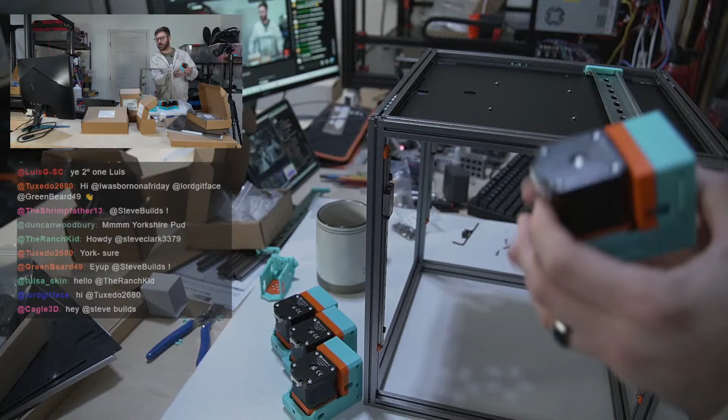So the last week we basically got, let's see if I change camera angles real quick here, all of the Z motor mounts built, and it went relatively smoothly. We are not installing the rubber feet until we install it on the frame. I did double check that. That's going to be after the AB motors. It looks like it basically has you build all of the different sub-assemblies, and once you have those all done, then you bolt them onto the frame.

So we got 4 of these done last week, and at the beginning of last week's stream we discovered an issue with the printed attachment pieces. Let me see if I can zoom in a little bit here. I'm going to change the autofocus, there we go. These DIN rails were a little bit short, a handful of millimeters, so I had concerns with these little printed pieces that if the DIN rail shifted towards one side, the other end could actually fall out.

So I took the model, because it's mirrored basically in both directions so you can scale it relatively easily, and I added 50% height to each of them. I installed one right now, and it seems like that's a good spot. So we're going to pop off the small ones. I don't know if this will be the case for everybody that gets this kit, or if my DIN rails are just a tiny bit shorter than intended, but I don't want to risk having the electronics shift.

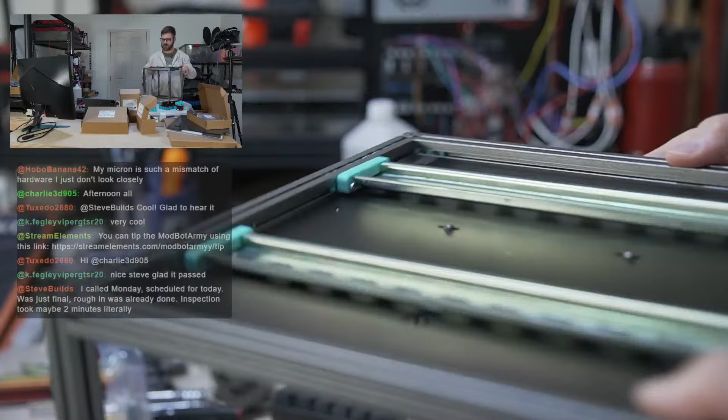So yeah, let's get these guys attached. I'm gonna leave them a little bit loose for right now, just so that way I can slide them around. We're not actually installing electronics yet. So yeah, you can see right now, with the DIN rail completely up against this side, this is our gap. Let me turn this, it's probably the easiest way to show. You guys see that gap?

So that's our gap. With the thickness of the initial printed parts, I was concerned that if it was favoring one side completely, we would have risk of the DIN rail falling out. So that's why I made it 50% wider. They hold pretty tight in the printed parts, but if for some reason it were to slide, I don't have to worry about the DIN rail dropping and any issues with electronics. That is why we ended up doing this.

I still have not gotten a chance to tell either Jason or Hartk, but I need to do that, because if it is a thing, I want them to probably update the parts, so that way people don't have to do what I did, which isn't a big deal because of the order of installation of this, but still.

You said, I called Monday, scheduled for today. It was just final, rough in was already done. Inspection took maybe 2 minutes. Wow, that's awesome. Yeah, I met our local inspector, I assume there's multiple, but I don't know with the size of our city how many they have. We had ours come out for the fan stuff I did, and he basically said he didn't have to inspect this, but the dude was really cool. I was asking him a bunch of questions about electrical in general, and he was happy to answer and show me the little cheat thing that he had.

The nuts on the bed extrusions, let me zoom out. Because there's not any covers on the end right now, this morning when I was flipping this over to put that first DIN rail on, all the nuts, I think it was the two up top and one on the inside, flew off onto the floor.

So I gotta be mindful of that. I probably should have just put a piece of tape at the end of it or something like that, because this is not the first time it's happened. You think I would have learned, but we'll put this off to the side. I don't actually think we'll need the frame for what we're doing today.

Okay, let's pull up the instructions here. Where are we? Here we are. Okay, it might be just your kit. I didn't have any issue with the DIN rails in the Formbot kit. Got it. Well, the Formbot kit will have rails from a different source that they're cutting differently. I haven't seen anyone else building an LDO kit yet, so maybe it's an LDO kit thing.

Hey, Nice. Hey, Raj.

Okay, so I didn't do this actually. We can do this if we want. There are two options for the Z-joint. Rigid, this manual only covers the rigid version. I guess we could install these guys. Actually, I already put the frame away. Let's just move on. This is what we did last week. Here's where we're at: the AB motor mounts. Let's start pulling out all the things we'll need for this. Motors are right here.

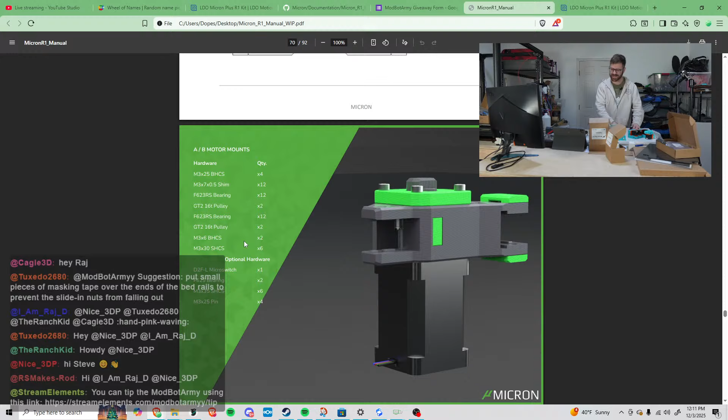Tuxedo suggests putting small pieces of masking tape over the ends of the bed rails to prevent the slide-in nuts from falling out. I just said that, Tuxedo. I should have probably done that, but I didn't. I agree. So I don't lose these, I'm gonna take these motor mounts out. I won't wait till it happens again. If we bring the frame back out and I remember, I will throw pieces of tape over them.

Okay, so M3. Let's just try to take out all of our hardware. This is M3 by 25 button heads. Now we need F623RS bearings. That's you guys. There we go, that's in focus, kind of. Okay, so shims, and we need GT2 16 teeth pulleys. What are these? These are shims, M3 by 6.

Interesting. The manual calls for M3 by 7. We have M3 by 6. I'm assuming that's what we're going to be using. I don't think there's any other M3 shims in here, so hopefully that's fine. We need some pulleys. This is a 16-2. These are 16 idlers, so maybe we don't need idlers for this section. Here's our other pulleys. We need the flanged bearings, and we're also going to need the non-flanged bearings.

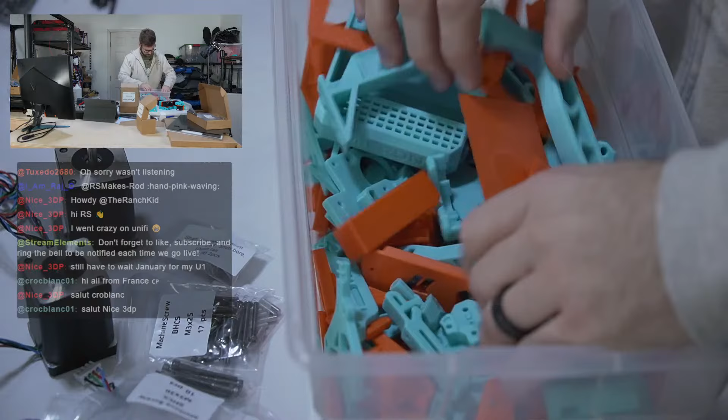Question mark. These are standoffs. These are bolts. These are pulleys. I think we're using these pins, I'm almost positive. Okay, let's throw all this hardware back in the bag and let's look for our printed parts now. So, let's see. Okay.

It should be one more motor mount, or yeah, motor mount piece. Start taking stuff out till I find it, I guess. There it is. Okay.

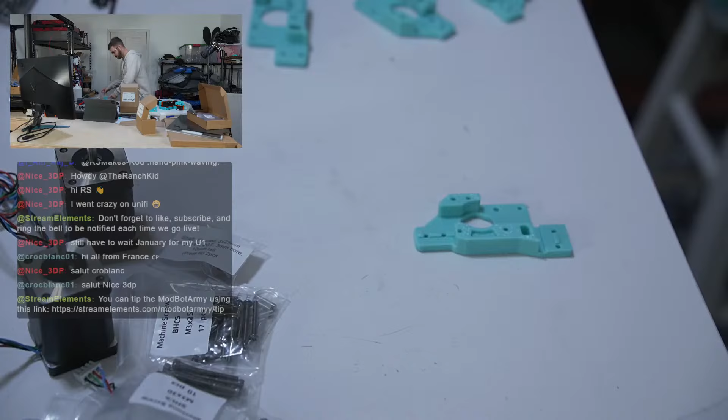Okay. So, if we are matching up this piece, let's zoom in a little bit. Oh, that's not what I want to do. So if we're matching up this piece, this is not... This looks like the right piece. Okay, it doesn't look like... This piece looks like it's using pins. But then this piece does not look like it's using pins. So I am not sure.

Let's see. Let's read. Let me zoom in a little bit so you guys can maybe see this too. More options than a brand new car. As Micron is as awesome as it is, there are two options for the AB. You can have a screw variant, no it isn't broken, or you have a pin variant. The former uses screws to house the various components of the bearing stack, the latter uses pins. We're going to be clever here and show you both options as the process is very similar.

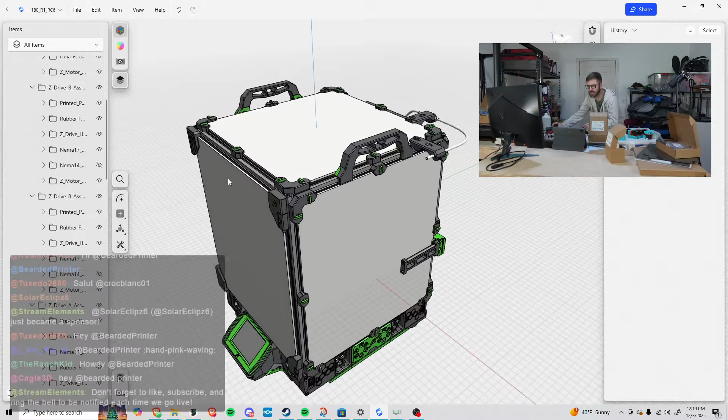I wonder if the CAD shows both options. Let's see. Let's exit isolation. Okay. Why are we not rotating? I thought shift was always my rotate button. What is going on here? There we go. Okay, don't need shift. Okay, so where's all the panels? Let's hide all panels. Panel assembly. Oops. Okay, so what I want to look at is this area.

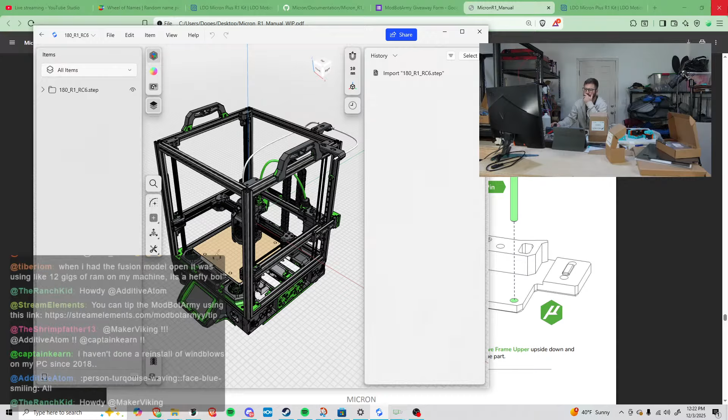I just would love to confirm that these are the right pieces. I have another idea of what we can check. Hold on. Let's set this off to the side for a sec here. And while it's doing its, oh, did it already load? Okay, cool. Okay, let's see if it crashes again, then I'm super sad. Okay, face A drive upper pin. Great. I just want to isolate this entire assembly.

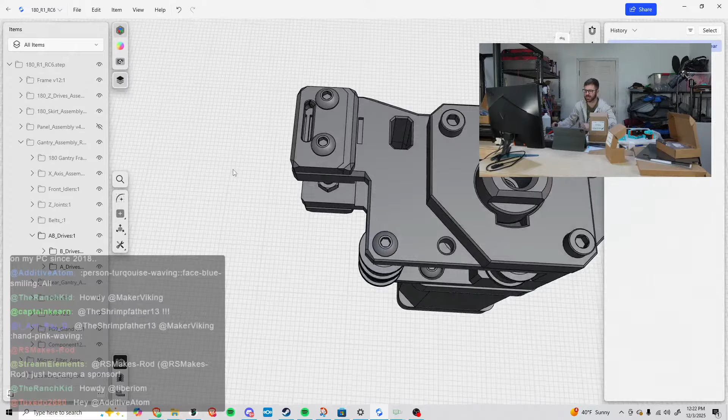So what I want to see is, this looks like it's a bolt. So the default setup in here is using bolts, not using a pin. So the next thing I want to check then is if we go to the Micron GitHub, I would like to see Micron Plus. I'd like to see if I can see the STL files and see the difference between the two, just to verify that I am using the right thing.

So if we go to gantry and we go to AB drives. Okay, so there's double shear drive.

No, that's not what I want. That's not what I want either. What is that? Twist lock retainer. It's not at all what I was expecting to see right now. Okay, here we go. A drive upper pinned. Oops. Let's just look at all the A drive stuff. A lower pinned. Okay. So this is how it looks pinned.

And it does have holes that go all the way through it, as we can see right here. So there is 1, 2, 3 holes. So this other side also has holes that go all the way through it. This one has a pin spot there. And this one also has a pin spot there.

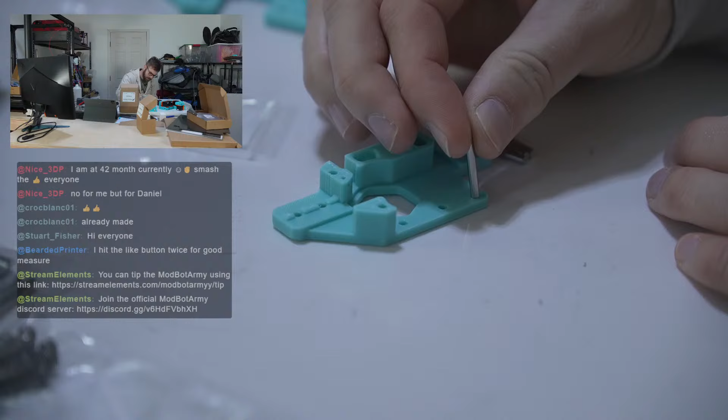Did that go all the way in? Sure did. Okay. Okay, cool. That's good. It says for the pin variant, place the A Drive Frame upside down and insert. Yeah, we did that. Fine. Still more options.

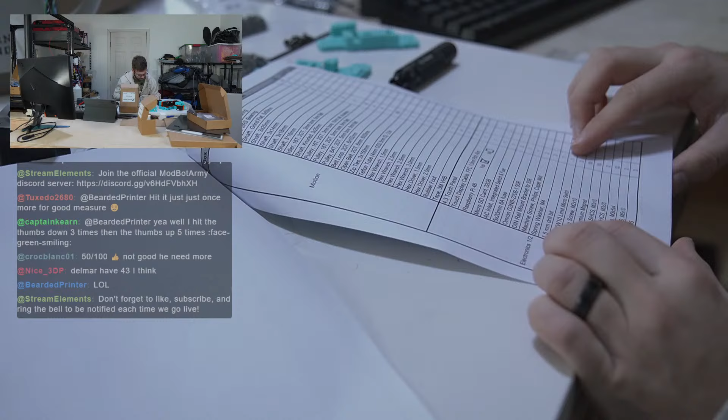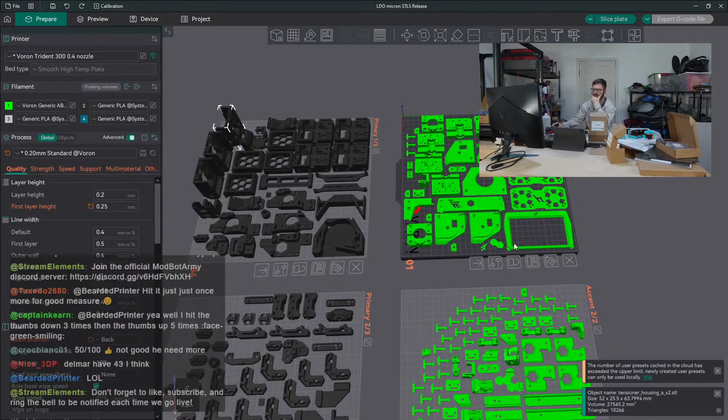Machine screws. I kind of get the feeling that this is sensorless, question mark. USB adapter, female, splicer. Okay, one thing I can do as well, it says that if you are doing sensorless, that there is this little piece here, and I'm pretty sure if we go to, here we go. So can we find that piece? Because if it's on here, and this was intended for, is this it? Y Endstop sensorless plug. Cool.

I'm gonna use that and make the assumption that it is sensorless, because this was given to me by HeartK for this kit specifically. So now I just need to find that piece. It's a tiny little orange piece. Does it have any sort of screw on it? It doesn't look like it.

Looks like it's supposed to be an accent piece, so it should be a tiny orange piece. This might be it. Definitely looks like it. Okay. I think mine had endstops and was going to use Klicky by default. Yeah, I think this one doesn't use endstops. I could have done a better look, but a quick glance over the BOM from LDO doesn't look like it had it. And HeartK had me print this piece out, so I'm gonna assume this is going right here like that.

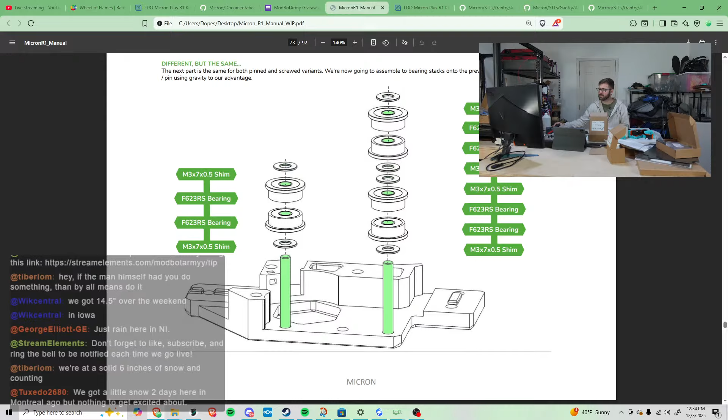Okay, so we should be good on this page. Shim, bearing, shim, bearing. Yep, that looks good. What does this say? It says preventative measures. Now, before you knock it over and have to rebuild the bearing shaft stacks approximately 7 times, we're going to secure them in place with the A drive lower piece. If using screws, you'll need to carefully screw them into the highlighted holes. If using pins, these are push fit. Ensure your end stop switch or spacers slid in the corresponding position. Okay.

So it's going to probably be in the same orientation, I would think. Is this right? This looks right. Wait. No, that can't be right. What is going on here? Okay, it has to be one of these two, right? Yes, it has to be one of these two. And it looks like it's this guy.

Why are we not going in? Okay, I'll get that piece in a second here. I just want to see why this is not going in at all. It's pushing through on the other side. Okay, let's try something here. Let's grab another pin. And this is the hole. Let's see, it's supposed to go into this guy. Yeah, that is tight. I'm nervous a little bit on this one.

I don't want to obviously push this one in too far because it's not even supposed to go in here, but I just want to see how much force it's going to take. And that is quite a bit of force. Like I see the part turning white a little bit, like an ABS when it's stressed out. You put too much stress on it, you can hardly see it, but at the very top there's a little bit of white. So I wonder if I should apply a little bit of heat to this part. It's very cold in this garage.

I'm doing pretty good. Not excited about shoveling after work. Got a promotion offer today. Oh, nice. Congratulations. That was to CowKing. Congratulations, man. That is awesome. Yeah, we've only had a shovel here a handful of times and I can't say I love it.

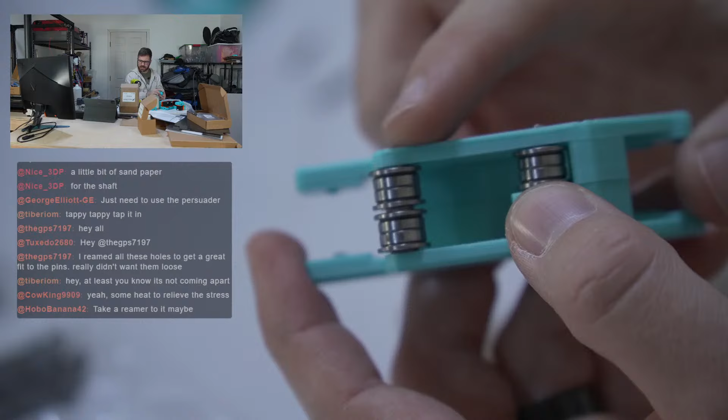It's definitely as far as we're going in. So the pins are sticking up a hair. I don't know whether it's supposed to be like that or not. I can measure it if you want, but they're sticking out a hair. On the bottom of the part, I'm starting to see stress marks, which is really making me think that I should not try to get in any further. We've basically bottomed them out.

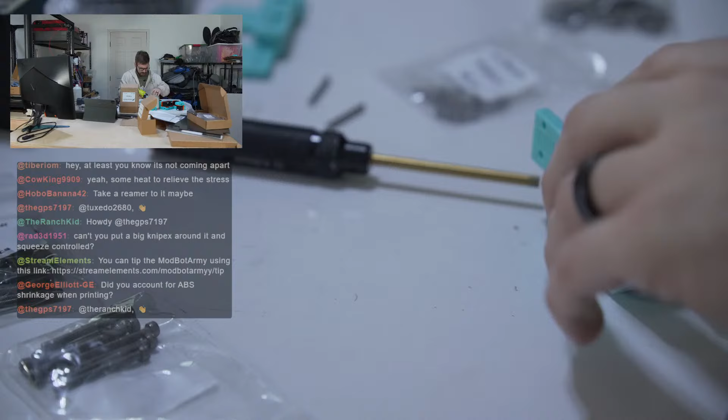I'm gonna hit the part with some heat. But I don't really feel comfortable going in any further with these pins. It's hard to get even into that spot. The parts are designed for ABS, so you shouldn't have to do anything else. That's generally how it's been with every Voron, I know this is not a Voron, but it's still intended to be printed with those same materials. I don't know on the pins whether they're supposed to be sticking out a little bit like that. I just don't feel comfortable going in further.

Because I'm seeing white on the very bottom here, which is a little bit tough to see because of the color of the part, but you can see white right there from the edge of the pin. I don't want to go in any further because to me we're basically at the wall. To be fair, I did mine like they were Trident idlers, but Mini, I think a couple people in the Discord were working on the pins. I recall SP had some issues and had to reprint the part.

Yeah, and these pins, this guy's up a little bit higher than this guy, but I just don't know what the call is. Bearings are spinning fine. The CAD doesn't show the pin mod, it just shows the screw version, so I'm not entirely sure. I don't think anything we did is going to compromise the actual part. I just don't know, with the way these are bolting, if having these pins sticking out a little bit is going to be an issue or not. I'm gonna say probably not.

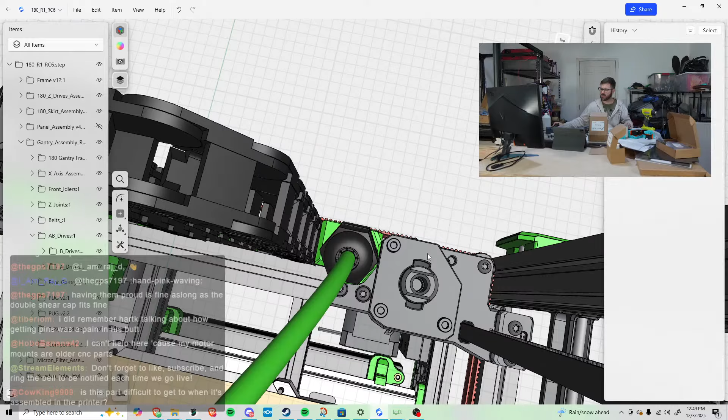It looks like the motors bolt on this side, and this side's gonna be up in the air. So if we look at this and we exit isolation mode, oops, not what I meant to do. So the pins are gonna be... let's see if I have this piece like this. So the only thing the pin is going to be bumping into is this piece right here. And I wonder if this piece...

Is this part difficult to get to when it's assembled in the printer? It's part of the flying gantry, and I haven't had to take that apart before on a 2.4, so I don't know entirely. I'm curious to see though, if we look at this piece, is there a section for the pin? Okay, this looks like it's the piece. And this is gonna bolt on like this. So this to me, wait.

I'm curious. I think that there's the hole. I think the hole in the bottom of this part is for the pin. Yeah, it's definitely for the pin. Okay, yeah. So the pin that's sticking up isn't going to be an issue because there is a hole in this part. That's my only concern. So that's not an issue.

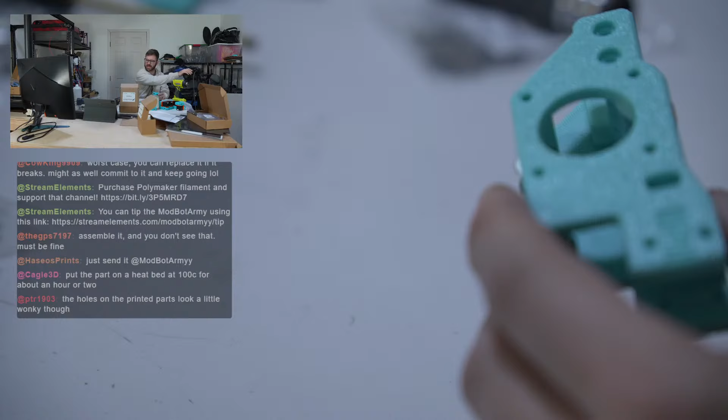This one's definitely a more aggressive one, so I don't want to melt the part completely. Yeah, I cannot go more than that. I see the part getting glossy. That's enough. We're not doing more. Okay, well, it did get the part a little bit warmer than I would have liked, you can kind of see the hint of gloss right there. But it did get more heat to where I wanted it to, so the part does look more solid now. So I think we move forward.

I am concerned that we might have to do that exact same thing again on the other side, but it looks to be a little bit different. So let's get back to it and see. The holes in the printed parts look a little wonky to me. Some of them I could see. Yeah, so this one's definitely wonky. This was a wall generating issue. The wall right here just looks bad. It looks like it's gonna almost pop out. That doesn't look good. But a lot of the other holes look fine, so that seems to me like a slicer thing.

I do have a vise. I have a really large vise, actually. Okay, let's just continue and see. I don't recommend doing what I did, but desperate times. Okay, we already double checked the shims.

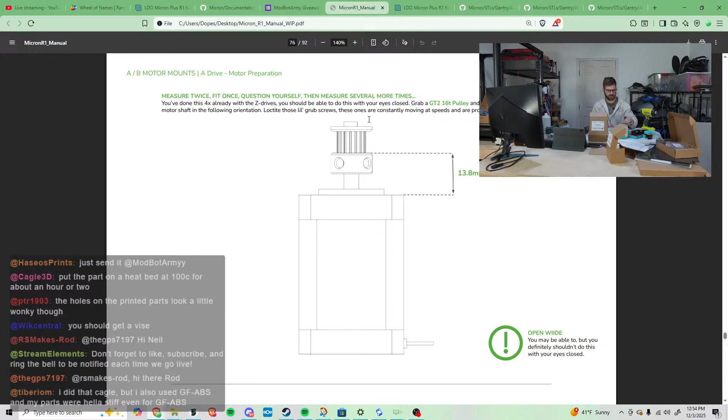What did Cagle say? Put the part on a heat bed at 100C for about an hour or two. You need to warm it up. I built it in annealed PETF. Holy crap. Did you use pins too? So yours was a struggle? Got it. So you reamed yours then. Yeah, my concern with reaming was that the pins would be too loose. But that might have been a better solution than using brute force and doing what I did. I don't know which one was the better call.

Hey, Balance. Okay, so for these, this is going like this. Let's do the same thing. So we need those little set screws. Where are they? There they are.

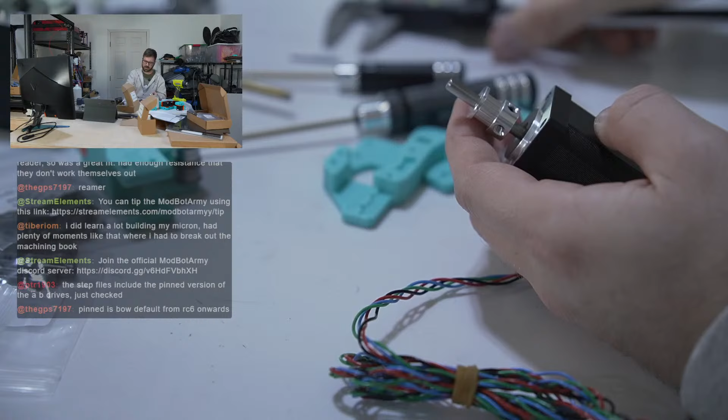Okay, let's really quickly check that again. Pinned is now default. Got it. Feels pretty dang close to where we want it. 13.8. No worries, man. Are you typing on a phone or computer? Okay, let me do a little bit more ugga-dugga. Okay, that seems plenty tight.

Double shear goodness. Are you not blown away by all of these Gucci options? There are 2 mounting options for the AB motors. So ours is dual shear. Dual shear adds a second bearing to further support the motor shaft when it's under tension from the belts. If you're not planning on using dual shear, you can screw the motor directly.

Default decision. Okay, so we are using this. So we are going to need, let's see, it looks like wires going out the right side. Then this is facing like this. Okay. And then we need that top piece that I just put away. So here they are.

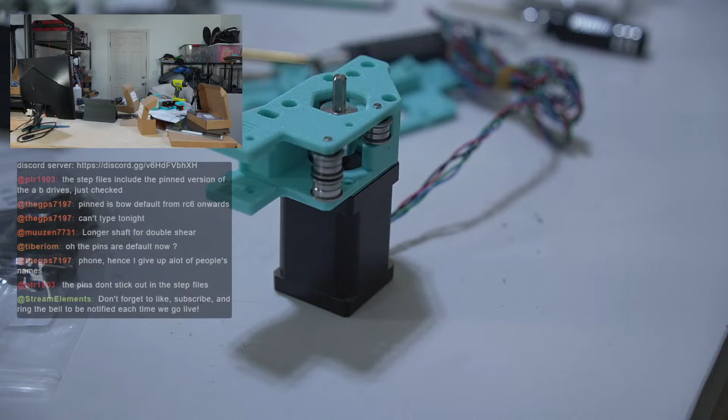Okay, so it's gonna go like that, but we need a bearing to go in here. So I didn't take out these bearings. This is a larger F695 bearing. I'll get the bearing. Where does the bearing go in? It looks like it just goes in from the top here, right? Based off this image, it just pushes in from the top of this part.

Like this. There we go. Oh, do you push it all the way down, I assume? Whoa, that really drops down. It really drops in there. Okay.

Cool. And now we need M3x35 socket heads, which I know we took out a moment ago. Oh. Wait, no, it said M3x35. So let's get M3x35. M3x40s, M3x35s. Hey, Petty. Goes in from the top and uses a twist lock. Nice, okay. I assume I have the twist lock. I don't see it in the instructions yet, but I will. Curious if it calls it out at all.

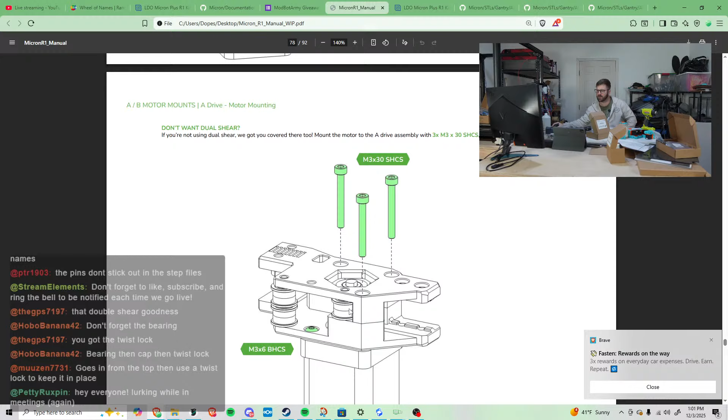Don't want a dual shear if you're not using dual shear. Huh, it doesn't show the lock piece. I saw it in the CAD a second ago though, so I know what you're talking about. Let me see if I exit isolation mode. This little guy, right? Let me see if I can find that. And I assume it's gonna be in the same color probably as this, so orange. Maybe it's not, actually. This looks like the piece, and it's definitely in blue. Okay. So this looks like the little nut piece that basically goes in.

Okay, is there a trick to getting it to turn? Is there a tool? It definitely needs to spin. I see that. Can I do it before? Let's see. So it looks like it twists to the right. Boy, I use Knipex. Okay, got it. Maybe I should secure this in place first. No, because then I'm gonna have a socket head. Okay, we'll try it like this. I've got my Knipex, so let's see if we can just do this. Maybe about there. Baby. All right. That worked.

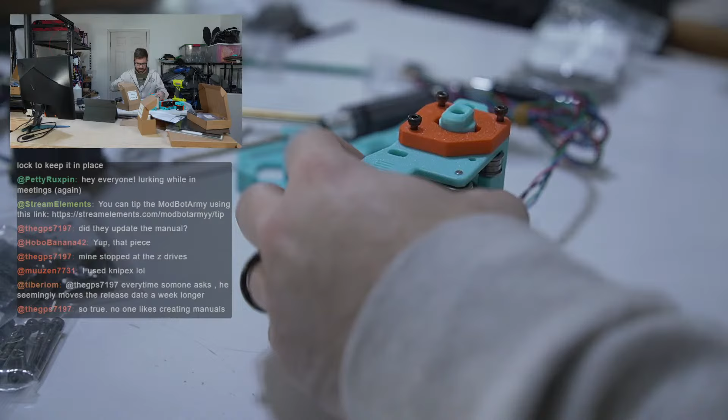Awesome. Okay, cool. Yeah, let's do these last 3 bolts then on this guy. So one goes here, all the way down. One goes here. One goes here. Okay. These are gonna be 2.5 millimeters. This guy, yep.

Every time someone asks, he seemingly moves the release date a week longer. Wait, did they update? Oh, got it.

Yeah, so far I've mostly been referencing the manual. There's been a few question marks where I'm like, all right, let's check the CAD, but so far it's been largely the manual. I know it says work in progress, so I anticipate there will be gaps like these little twist pieces. But so far, I'd say the manual's been pretty dang good. Okay, I think that's tight. So the last thing is just, it looks like an M3x6 button head, which is gonna be right here.

Yeah, creating manuals is a ton of work. Let's see, can we get this through? Yeah. So I'm part of the content team at LightBurn, and a fair amount of my team works on the documentation. I do the videos for the documentation, but the amount of work that goes into good documentation is absolutely bonkers. It is a ton of work. So every time I see documentation that's thorough and covers a lot of things, it is not a simple task or a fun one at that. But boy, is it a necessary one for people to be able to follow along.

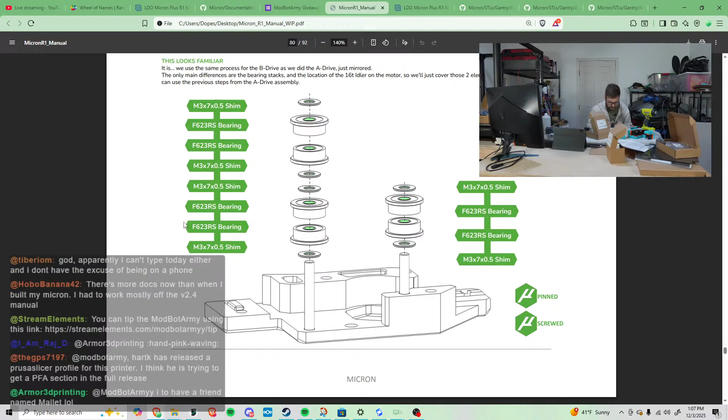So now we're on the next side, so we get to do it again. Fingers crossed that we get through this without doing any irreparable damage. I guess nothing's irreparable. Okay, on this side it goes into the deeper pocket first, so I am absolutely going to hit this with heat. I think we'll use the more aggressive heat. I'm going to go further away because I saw the part getting a little bit glossy on the last one.

Let's see if we can convince this part to accept our pin without such a scary struggle. I really want to get more than just the top, the walls where the pin's going in, because that's where we saw a lot of those stress marks. This is a really hot wand, it's for BGA reflow or rework, so I definitely don't want to do too much. That might be honestly enough. Let's also not have it pointing towards me so I don't catch on fire.

The time it's taking me to get back over here might be not great for what we're trying to do. It's already probably too late. Yeah, it's already looking stressed out. We're likely going to have to do what we did last time, which is just YOLO it, hope it doesn't split, and then hit it with heat after to try to repair some of that. I'm wondering if, instead of hitting the pin, I should hit the printed part like I did on the last one, against the quartz.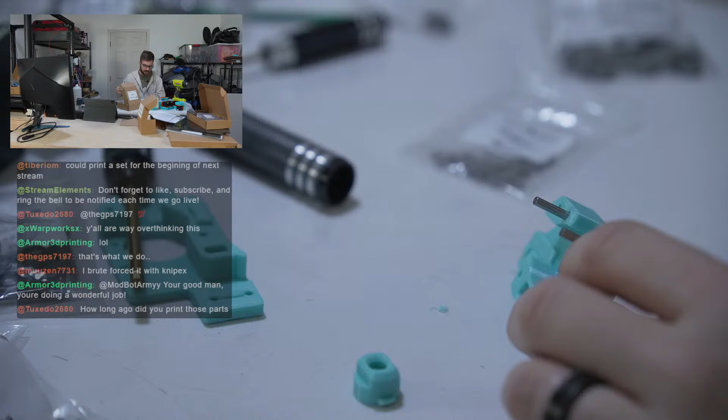Okay, let's do the other pin. The other pin should go in much easier. Yeah, this pin goes in piece of cake. It's something about these deeper ones where they just required a lot more force. Using the Knipex might have been a better route as well, just to get it over the pin and press it in. Anyways. How long ago did you print those parts? 2.5, 3 weeks maybe? It was before we started the build, and this is week 3, so 3 weeks-ish?

Double check those shims. Okay, so this side should, and keyword should, go on a lot easier because this is shallow. Yeah, this is the shallow side. So let's see if this just goes right in. Let me make sure they're lined up correctly. That looks fine. That looks fine.

Nope. Still wanting to push through. I might Knipex these. I just want to make sure that it is lined up correctly. Let's see if I can just get my thumb on it and push. It's not. That went in a little bit. No, not really. Okay, yeah, let's Knipex this.

A little bit more. The Magigoo polypropylene stuff works well. That's one of the ones I remember seeing. I just never used it myself. I try not to, oh, okay, that's too wide. I try not to speak too much on things I haven't actually tested myself. If there's enough people that I know that print using something, I'm kind of okay with it, but I'm not

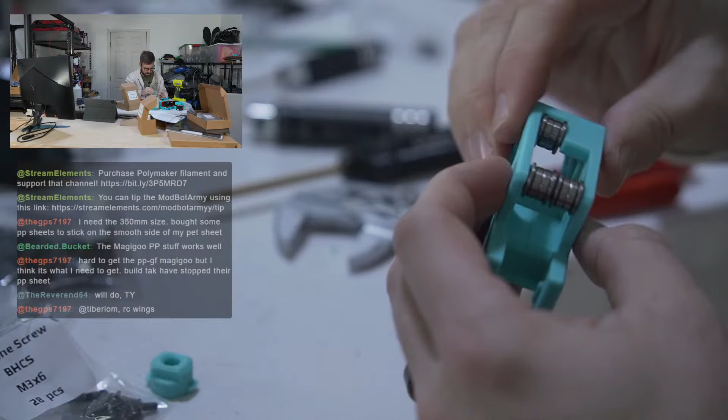Okay, that seems like that went all the way. And that went all the way. Okay, I think that's good. Parts are spinning, pins are sticking out of there. Don't see really any, oh, there's a little bit of stress mark on this one. That's fine. That's how the other one was as well.

Yeah, I think the pins, I don't know, whatever. I guess the reason doesn't truly matter. We won't really know, but I wonder if the pins are slightly large on the ends and that's what was causing part of the problem. But it might not be. I don't want to say that that's the issue. I'm fine with saying it's user error. We can totally blame. I'll take the blame.

Okay. Hard to get the PP GF Magigoo, but I think it's what I need to get. BuildTak have stopped their polypro sheet. Is BuildTak still around? Man, I loved BuildTak for so long. But I don't think they do events anymore, and I just don't think they're around much.

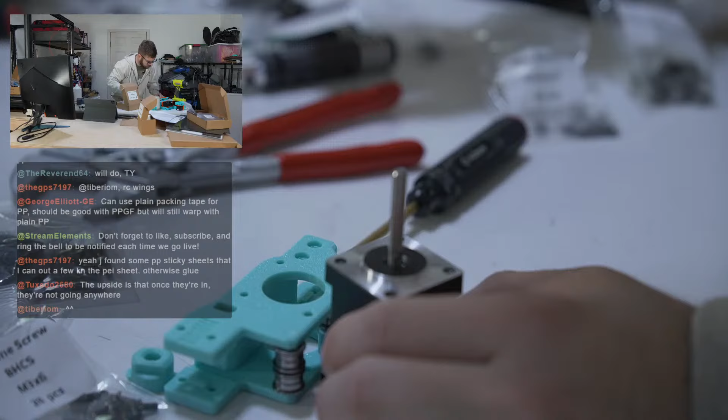Okay, so for this one, we want 11.6 on our calipers. So let's grab our other motor, which is right here. Where is our other pulley? Here we are, last pulley. The upside is that once they're in, they're not going anywhere. The pins, is that what you're saying? Yeah, they're definitely not going anywhere.

I have a feeling everything is gonna be fine. That whole instance we just went through, I could see someone trying to build this and being like, what in the world? Which, I mean, we did too. But I think it's all going to be fine. Like I said, I don't think it's going to affect performance. Or not performance, but integrity of the part, which in turn, I suppose, would affect performance.

Okay. So we're just doing single set screws on this too. It seems like this kit only has enough for one set screw per pulley, which is a little odd. It's probably something else I should note as well, but considering there's a flat section on these motor shafts and they've got Loctite on them, it should be fine. I still think it would be not a bad thing to include a second one in this kit for all of them, but is it necessary? I'm gonna say probably not.

11.6 is what we want for this guy. 11.6. There we go. Okay, and this one is measuring from the top of the motor to the bottom of this upper lip. So let's turn this like this. And we want this. That's pretty low. I'm gonna say right about there.

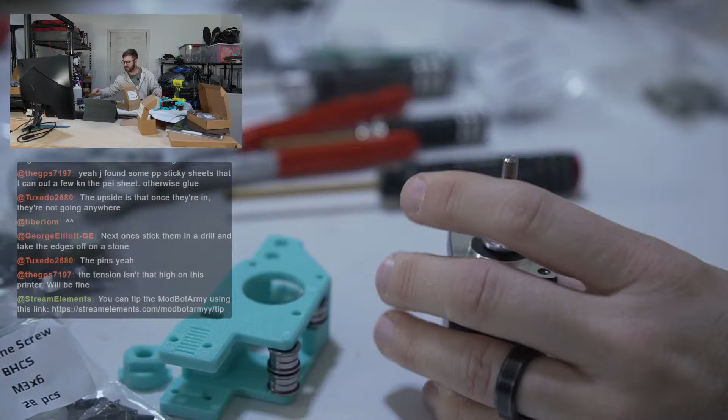Okay, so we did that. Yeah, we did that. This is saying now it's the time to sit and admire your work again. As we previously mentioned, the rest of the steps are the same as A drive, so once you follow those, you should do the same.

Wait, you should have something that resembles below. Oh, bearing retainers. So it does mention the bearing retainers. Okay, cool. So let's just go back up to the other one and basically mirror that, which I think is just the orientation. So I assume that if on this one we've got motor going out this side, we probably want it going out the opposite direction on this end.

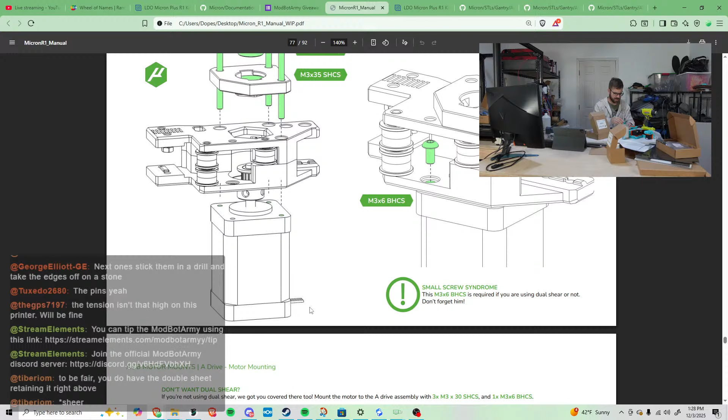So let's see, like this. I think like this. Maybe? What am I doing here? Yes, so this should be opposite. Okay, so yeah, this looks like it should go right here, like so, which is cable going out left side here. Then we need our bearing. Where's that bearing at? There you are.

My thumb actually hurts because in the process of trying to remove some of the remnants of the PET, some of the PET glass fiber, I was using one of those scrapers and had my thumb in a place where it shouldn't have been and slipped and nicked myself. Luckily it wasn't horrible, but it was at that point where I told myself, I'm done trying to clear this. Like this sheet is too far gone.

Is this upside down? This feels like I did this. No, this has to be the right? There we go. Yeah. Okay, now I can push this all the way down. There we go. And then we insert this like so. Let me just make sure. Okay, so this one, it's turning towards the left. Just want to make sure I don't force it in the wrong direction.

I did not Loctite the grub screws, but the LDO kit comes with Loctited grub screws. There's already dried up Loctite on them. Is it as good as actually Loctiting it on the spot? I don't know, but in the case where LDO kits have had Loctite, I haven't done it in the past and it's never been an issue. So we're gonna just roll with it. But if you were building this not from this kit and your grub screws didn't have Loctite, then yeah, you'd absolutely want to Loctite them.

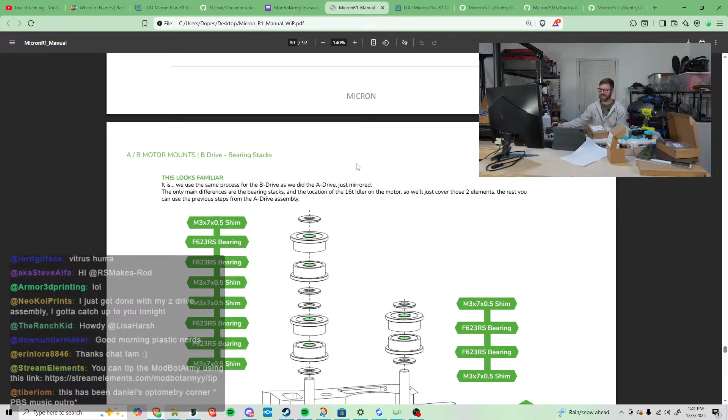Dude, if you don't catch up to me, something's wrong, because I'm a lot of things, but a speed builder is certainly not on that list. Okay, so we're done with this. We did this, we did that. Sick! We're on XY joints. Awesome. So let's take a look at these. These turned out, I think, really nicely, all things considered.

I'm curious to know, on yours are you using pins, or are you using bolts? If you're using pins, let me know how tight or not tight the tolerances are. I'm really curious, because ours were very, very tight. But yeah, these look good. Look like AB motor mounts to me. Quite pleased with the end result. You can't see my stress marks. They're all hidden behind the bearings, but I think these are gonna work totally fine for us. So let's get started on the idlers, since we've got a bit of time here.

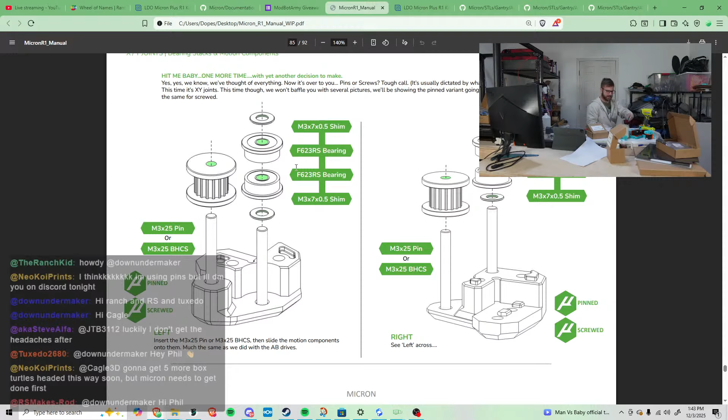Where are these pieces? Okay, this looks like one of them. So it's gonna be in our primary color, not our accent color. Could be 4 of them. The issue is that these pieces look kind of similar to other pieces. Oh, actually, these are not. Okay, so there's one. 2 of the pieces have heat inserts, so I put them in a separate bin. So we only need to find 1 more of these guys, the 2 beefier ones. God, we're gonna have to do more pins. I'm so nervous. I mean, we'll probably be fine. We've already gone through this once.

Where is our last piece? There's a lot of pieces to this build. Granted, a lot of these are skirts and screen mounts and stuff like that, but digging through this, there's definitely a lot of parts. So, here we go, found it. Okay, I think that's all the prints. Oh, you know what? We're probably gonna need the little spacer guys, aren't we? I'm sure we will. Okay.

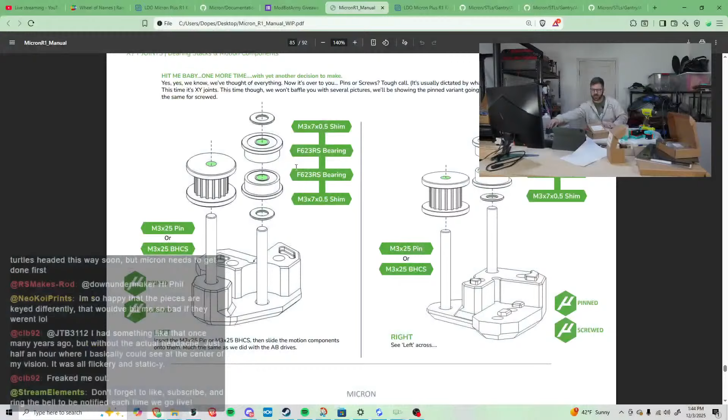We got a Britney Spears reference. Hit me, baby, one more time. Love it. I guess we know. We thought of everything. Now it's over to you.

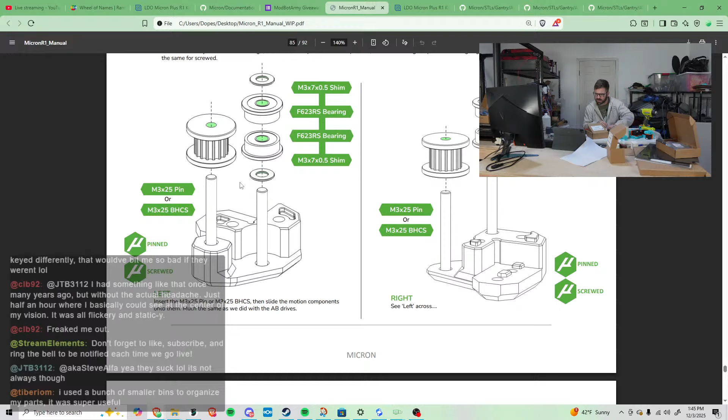Pins or screws? Okay, so we're doing pins. These are the same. Wait, are we doing pins for this? We can't be doing pins for this, can we? We don't have enough pins. I'm counting 1, 2. I don't think we have enough pins. I'm so happy that the pieces are keyed differently. That would have bit me so bad if they weren't. Yes. Anything that can be done in the design. If we were supposed to use bolts, there's no way. But I am confused now. I'm very confused.

Let's check something here. I assume that if we were supposed to use bolts or pins, they would be named as such. So where's the motor mounts? Okay. These are 100% pinned, at least according to the name. So we did that right. But if we're looking at these guys, this doesn't say anything about being pinned. Where's the other ones? Upper right, live idlers. I don't know what the significance is of that.

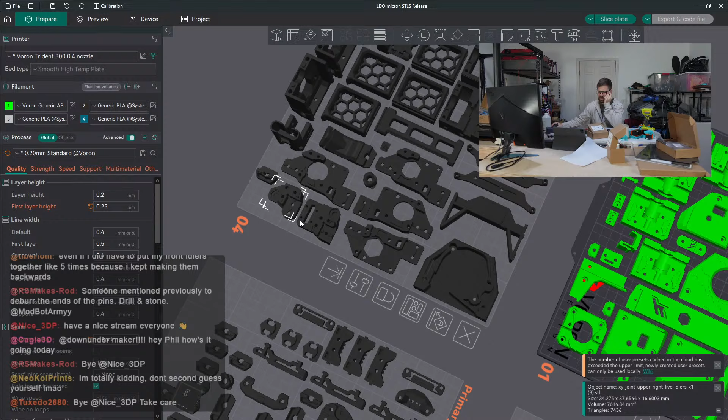Heart K gave me this. If it were me, I would be importing just a few STLs at a time. Yeah, Heart K sent me this. I don't know if he's the one that was behind this, but this is beautiful. This is very, very clean. So yeah, I don't know what in the world. Live idlers have extra bearings in them. Got it. Okay.

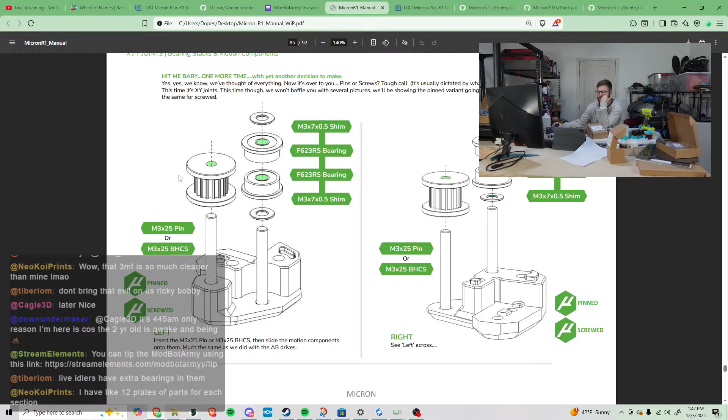But I'm confused about the pins. It feels strange to me that we would use... Wait, are these only using? No, this is basically showing we need 4 pins, right? Let me read here. M3, wait, 6 pins.

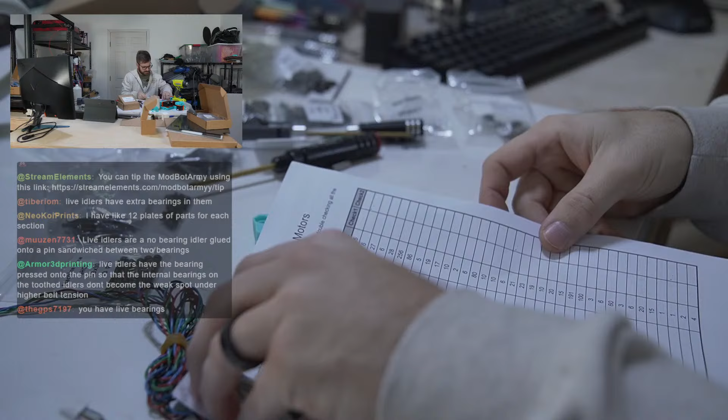Four pins. Okay, 4 pins makes sense. That's what we used. 6 pins doesn't make sense to me when there's only 2 pieces, but regardless, let's check the BOM. Let's make sure that I'm not somehow screwing this up and that there's pins supposed to be these here. So I'm gonna assume these are not under fasteners. These are probably gonna be under motion. Bearings, shaft. Yeah, so there's a total of 6 M3x25s. So if we've used 4, which we just did, then we have 2 left, which is not enough. So we are going to use bolts on this.

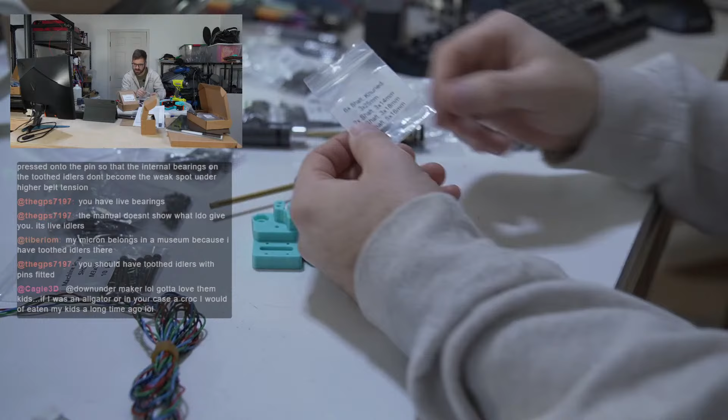Is it weird to use bolts on one and not on the other? I find that a little bit strange. I'm gonna definitely make a note of that and probably ping Heart K to see, is it supposed to be like that? Is something off? I guess I could have just looked at this bag, but yeah, this bag says 6 3x25s, and that's not enough. These parts look like they're intended to use pins though, so maybe we use pins for part of it and bolts for the other. This is definitely a part that can use some clarity.

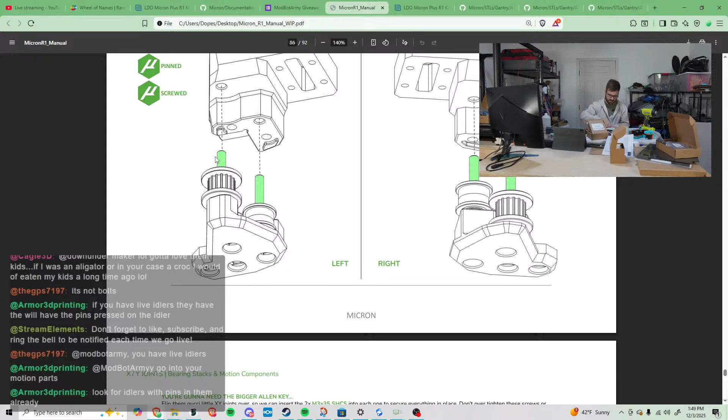I don't feel like it's obvious. "It's not bolts. If you have live idlers, they have the pins pressed on the idler." You have live idlers. Okay, does that mean I don't need that then? I don't need 4? Oh, idlers with... Okay, this makes sense now. This makes a lot of sense. Yeah. There are idlers with pins in them. I saw them earlier. I think I even took them out anticipating we might need them. Here they are.

"I don't have fancy idlers with pins in them." Well, maybe you won't be confused then. So, are these idlers? Oh, interesting. So these are already pressed to a certain length already? Okay. That, I suppose, makes some sense. So my parts are going to look different, is basically what we're getting at here. My parts are going to look quite different. And are there any instructions on how to actually assemble these? Because there are bearing slots for these. Are there any instructions? Or is it basically going to be the exact same thing?

But okay, so I'm gonna make some assumptions here. I think we need to install probably a flange bearing into these guys, because that looks like the flange must have to go this way, and this definitely looks like a situation where my boy Knipex is gonna come in clutch and save the day. Let's see. Okay, that felt right.

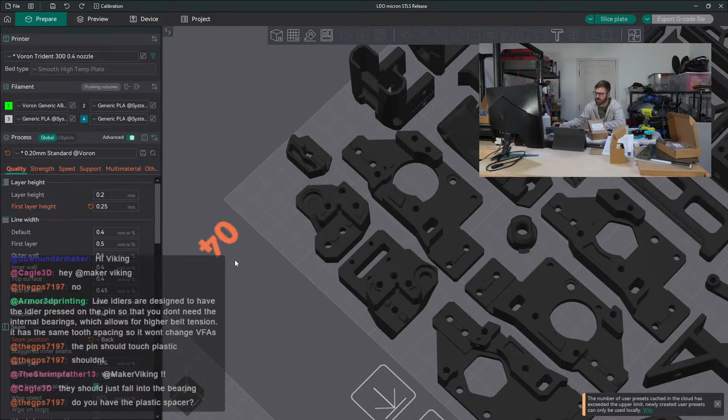Interesting. Let's go back to our little 3MF guy. Okay, so I see on this side, definitely there's the pin that's too large, I think, for the pin to slot inside of. Okay, so I see what you're saying. It basically looks like it should just sit. So do we think that that gap is... first off, are these the same? These look identical. So the lengths of these pins and the spacing.

You should print cylindrical spacers. I think I have them. I assume I have them. Okay, let's do some things here.

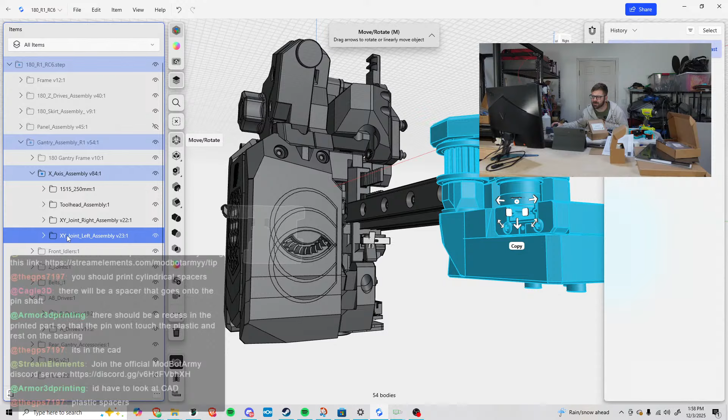Okay, I see part of our issue is there's, let's see, so XY, there's two XY. I can't read, let's see. X-axis assembly. Okay, so I do see a printed spacer right there, but I don't see one on the other side. Yeah, I see this guy, but is there a reason I only see it on one side? Is one side not needed, or is there an issue with the CAD?

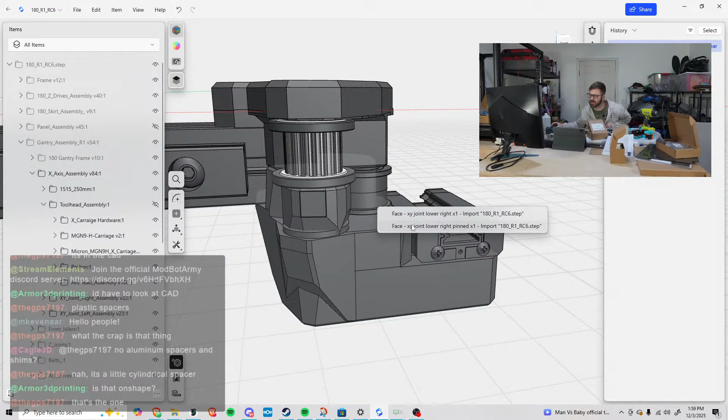I think it's supposed to go here, right? What is this? Is this part of one of these? Yeah, this doesn't look to be a part of this. So what in the world is this? XY joint, right? Okay, hold on. Live idler, okay. Pinned? Okay, there it is. There she is. Okay. We're still shimming though, right? Like, I'm still putting a shim on top and bottom of this? I have to be. Okay, let's find this guy.

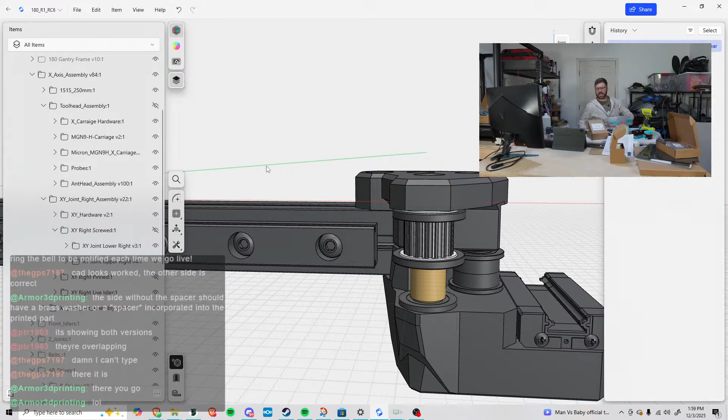It was really obvious that they were overlapping with the toolhead, but it was less obvious that they were overlapping with the XY joints. Where in the world is... I have not seen a spacer. It's a really small spacer, so let me make sure I printed it. I'm gonna assume I did. Okay, I don't see it there. Don't see it there. Oh, here it is. Okay, so it's gonna be in orange. Found one. Found two. Got it.

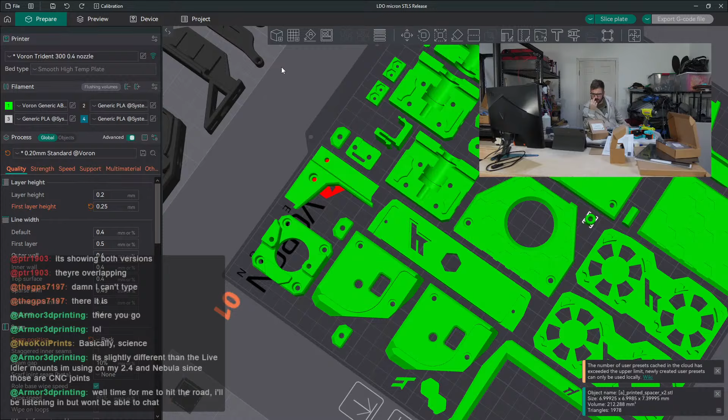Well, time for me to hit the road. I'll be listening in. Won't be able to chat. Hey, thanks for hanging out, man. Appreciate it.

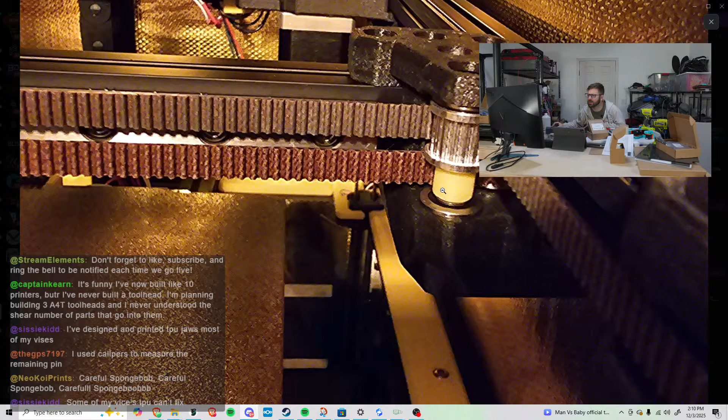Okay, that is bottomed out. We are not going any further. Okay, so I've got that. GPs, you said you sent a photo. Let me see what that photo looks like. Okay. Okay, so looking at this, it looks like a hot printer. This looks like it's very insulated. The only question I have still is in regards to shims.

This looks like this printed spacer is up against the flange bearing and that there's no shim between them. But maybe a shim between there, which seems a little odd to me. It's not totally clear to me the stack of shims on this part. Not a shim on the stack.

Okay, so you're saying that for this side, which, hold on, it was this side right here, I think. Yeah, so we're saying that on this piece right here, there are no shims at all. It's just straight up pin, little printed spacer, the pulley, and then this goes directly into the plastic, not a single one.

The spacer, okay, got it. So on this side it is, but you're saying on this side there is one. So one between this and the bearing? Because of the size of it. On this one, the spacer is sized accordingly, but on this one it's not. So we want something so that way the rotating portion isn't touching plastic.

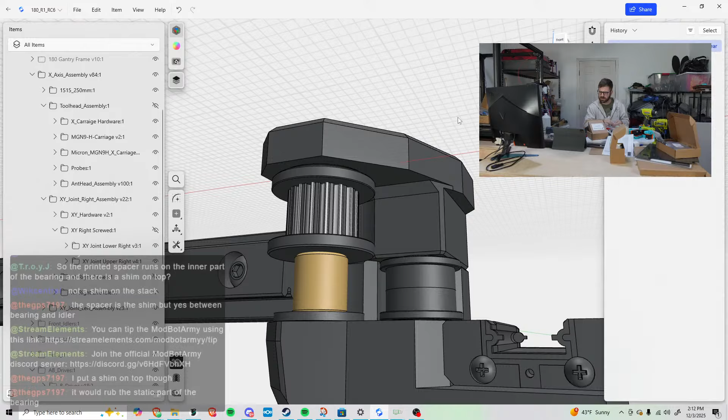I put a shim on top though. I mean, looking at this right here, it looks like there's totally a shim in the CAD. So there's none there, but there is one on top. Yeah. So there is supposed to be a shim there, according to what I'm seeing here. So with that being said, let's throw a shim there. All right. So there is indeed one going on top here.

Cool. And then let's just throw one more shim and two bearings on this side because that has to be how it is. Like that, one U, cool. And then what am I doing?

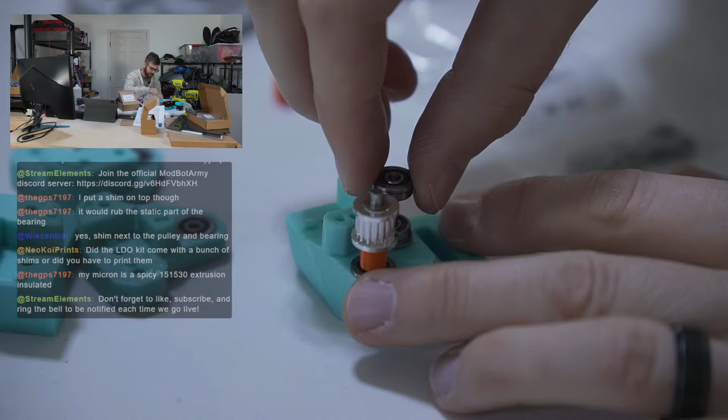Did the LDO kit come with a bunch of shims? Hold on, I can answer that with a visual in a second here. So the only printed shims I'm aware of are two of them, which are basically these little guys for the XY joints. There's no other shims outside of that. I don't know which other ones you might be referring to that would be printed versus not printed. The kit came with a bunch of standoffs, which I think are maybe for electronics. I don't actually know.

The Micron is a spicy 151530 extrusion. Yeah, that's awesome. I was gonna say, it looks spicy. When I see insulation like that, I'm like, this is a hot boy.

Okay, so I think that's fine. Bearing, printed spacer, pulley, shim, bearing, shim. I think this side is done.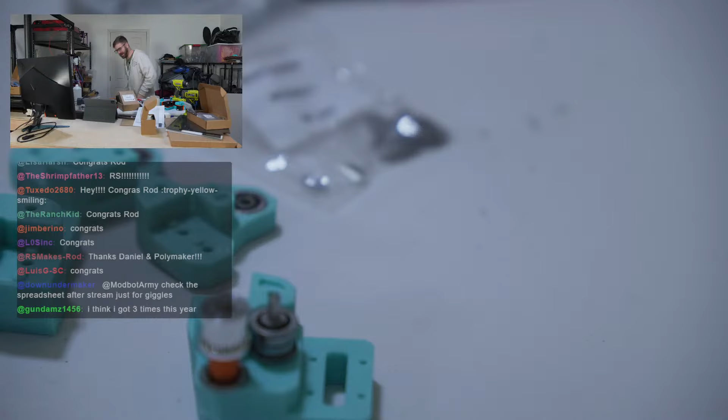I do want to see downunder's name on here. Let's see. I don't see it. I don't see any emoji or anything making it stand out. Let's see. Yeah, I don't see it. Wait, can you check the spreadsheet after? Okay, all right, I'll check it after stream. I don't know how appropriate it is or not. I've definitely said and done things on stream before without thinking, and afterwards I'm like, maybe I shouldn't have read that out loud.

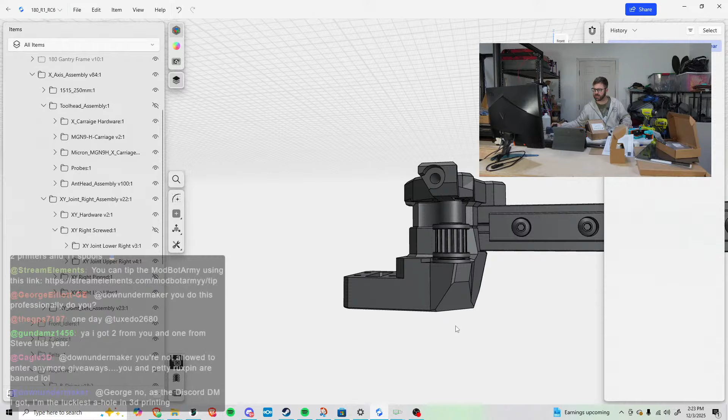So I'm just gonna, for this, reference the CAD. It seems easier. So we've got the... oops. Okay, so if we've got this piece here, and it looks like that cannot be right. I guess it can be right. So this is just gonna float. Okay. So it looks like on this side we need a shim. Let's see. So I should probably be inserting.

So this is going to be like this, which means that the pin. We might not need it on this one. Let me see. If I do spacer there, then this guy like this. Okay. That's that. And then we've got the printed piece, which is not going. That's right. That side has a little extra lip. If I push through there, it should pop it right off. Okay. And then I think this is just gonna sit like this. Yeah, that works.

Okay. So the only thing we need is there should be another. Where's the other one going? Okay, so it looks like the other one is going in here. So we will need to do the same ordeal. Let's do this. Oh, that's a heat gun. I'm not used to having two power tools next to me while building. Okay.

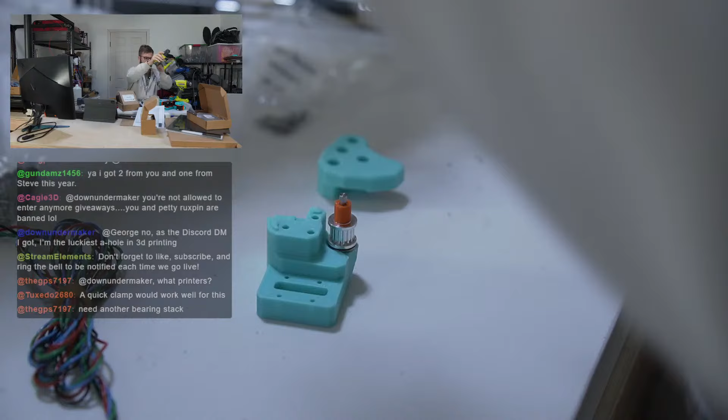We'll basically get these pieces together, these last ones, and then I gotta call it because I told Erin I would do a hard cutoff of 3 today. She's gonna take the kiddos to go play. Well, mostly Jackson. Landon's a little bit too young to go play, but.

Okay, this needs to go in further. I'm just gonna try to whack this one with the mallet real quick.

Jack? Jack? Jackson? I'm just banging on the door. It's gotta be Jack. Oh. I think he's in trouble.

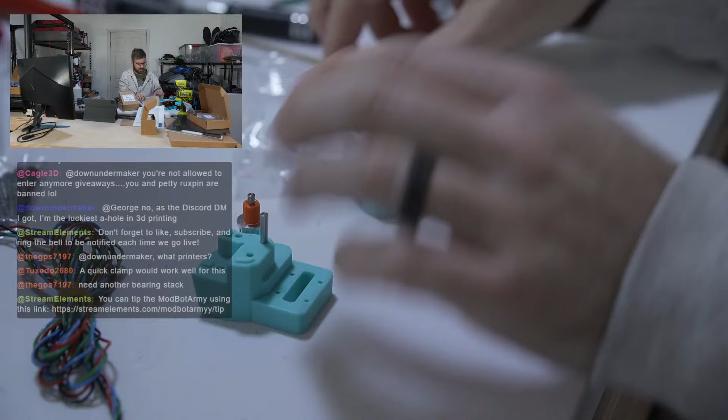There we go. Okay. Okay, it still goes in further. I think that might be, these probably should be the same heights. I think we just bottomed it out. Need another bearing stack. A quick clamp would work for this. A quick clamp? What is that? Is that a thing, or you just mean like clamp it? Okay, so yeah, one more bearing stack I assume on this side. Kind of mirroring what we did on the other side.

So let's go a spacer. Bearing, oops, bearing. Come on, buddy. There we go. Okay. And now this should just align. Actually, let me look at a CAD so I don't assemble this incorrectly. That's okay. Okay, so it looks like we want this facing like that, and then this guy facing like this. That seems right. Okay. See if we can do this with my hands again.

Holy cow. Where are we not going in? Is it this guy, the bearing stack? The pin looks like it's going in fine. Okay, I'm just gonna push on the table. You put the shim on the wrong stack? Wait, what? Yes, I did. That I did. Wait, no I didn't. Yes, I did. Yeah, you're right. Okay. Thank you, GPS.

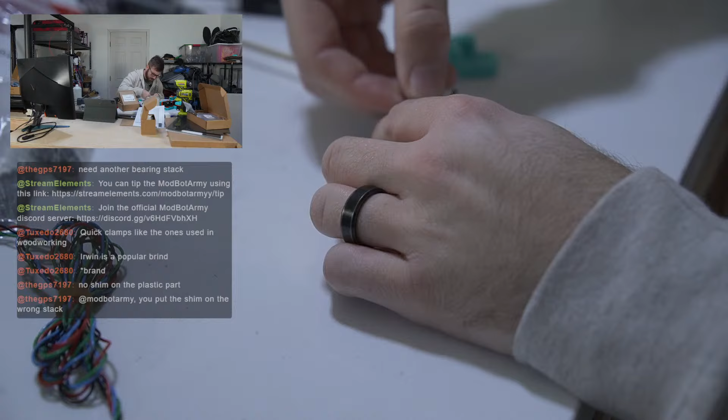Okay, let's try that again. So, shim between these two. Okay, no shim on that plastic piece. There should be a shim right here. Yeah, now I think we're good. I don't know, I must have been... Yeah. Good catch. I think I got distracted by...

Jackson was tapping on the door, and then I called him, and then I heard him start crying because I think he's not supposed to be coming out this way.

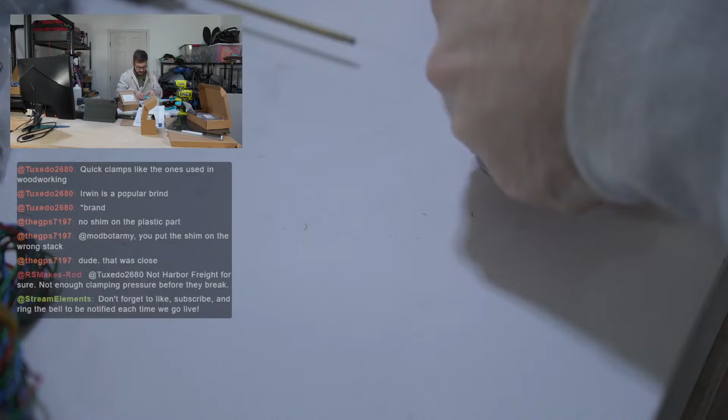Good save. Okay, so this is keyed, so we can see the key needs to go like this. So let's see if we can get it this time. That's definitely aligned. Okay. It feels like it's the top of the smooth pin, or the pin that is not wanting to go. I'm gonna push and just see if we can get it to go. Yeah, that worked. At least I think it worked. It mostly worked.

It's a little bit of a gap. I'm gonna assume that these will probably be pulled together in a second here with some hardware. But that looks right. Is a shim. Okay. So this looks right. There's a shim on both sides, I think. It's a really thin shim. Yeah, that's fine. This one doesn't have one anymore on the plastic side. It does have one on the other side. I think this is right.

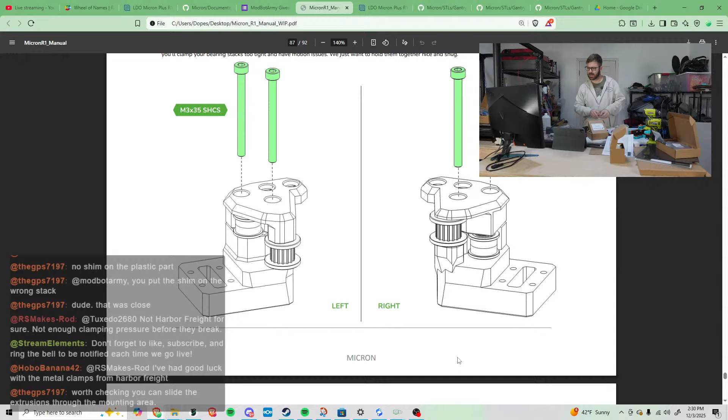Okay. What I'm curious about now, though, is if we go to the instructions. Yeah, all right. So M3x35s. This is the last thing I want to do right now is get these 2 or 4 bolts in. And I feel like I can end it on a pretty good note. And I think that next week, we are going to be just starting to install these things, right? Yeah, that's awesome. Okay. So let's get these bolts in place. 1, 2, 3, 4. Flip you over.

Okay, and we are going in, it looks like this one and this one. I think, yeah. Yep. Awesome. Thank you for catching that, GPs. That would have led to problems. Worth checking, you can slide the extrusion through the mounting area. Oh, got it. On this side? Yeah, that's a good point. Yeah, that seems fine. I guess I probably don't want to over tighten these then yet. Or maybe if I tighten them all on here, it'll prevent issues.

Yeah, it's pretty tight. It still slides on fine though. I'm not going to tighten it more than that though, because I'll probably just end up having to untighten it when I put it on the extrusion if I do too much right now. So this one is these 2. I guess it's the ones that aren't on the extrusion. Wow, this one does not want to go in. There we go.

That's what I did. Mine clamped on the extrusion if I over tightened. Yeah. I've done it before on, I don't know if it was a Trident or a 2.4. Let's see. Yeah, that seems tight enough and I can still slide it mostly on and off. Yeah, there we go. I can still slide it on and off.

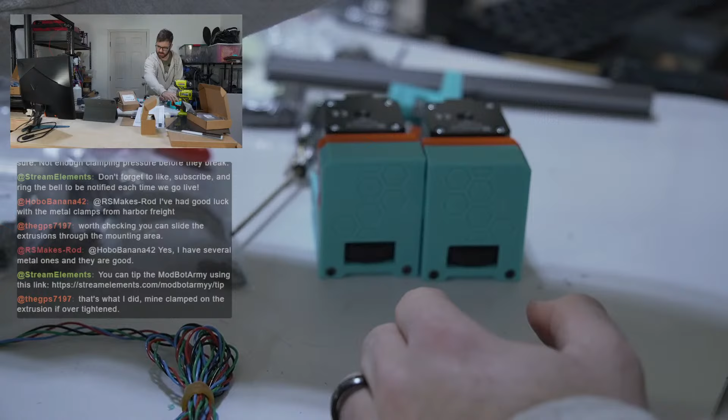Cool. Nice. All right, let's take a quick recap. Quick little recap of what we've got done. So we've got all of our Z drives ready to be mounted onto the bottom of the frame. Boom, boom, boom. Looking good. Let's focus. There we go.

Then we've got our AB motor mounts done. Looking good as well. Like I said, I think everything will be totally fine with these, regardless of the pin issue. Seems fine. And then we also got the XY joints done today. So I think that the next week will be mounting stuff and probably assembling. Let's just take a quick look. I gotta call it in a moment here, but okay.

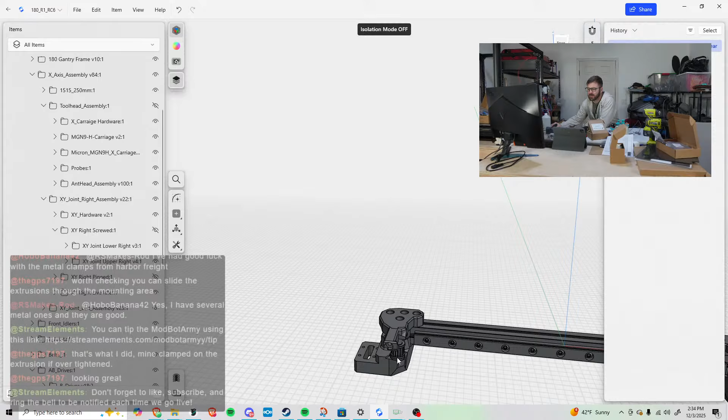So yeah, feet are going on. Okay, so we'll be belting. Oh, is that the end of the instructions? It is the end of the instructions. Ooh, okay. So from here on, we will be on our own. So we will be belting the Z, and then I assume we won't belt this until the gantry is in place. Then we'll probably work on installing the extrusions and rails, and then the X carriage and belting this.

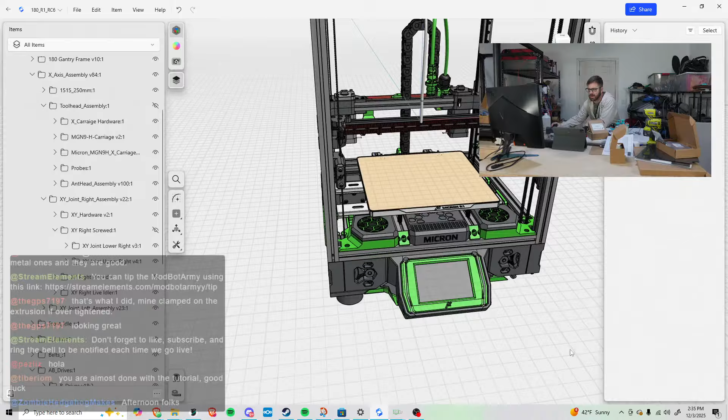Yeah, we'll figure it out. I might have to reference the 2.4 manual. It's been a minute, because I assume it's going to be quite similar as far as how we're following things. But yeah, we'll figure it out. I know that we're going to need to get the gantry on, and then we're going to need to belt it, and then we're going to need to work on the tool head. And then I think it's mostly electronics after that.

So, hey zombie! You came just in time for me to say farewell. I had a hard cutoff today. So, Aaron's gonna take the kids out. My dad's coming over and do some yard work, but made some good progress. Some really, really good progress.

And I think that next week will be a little bit more squirrely, especially because there's just not an A to Z manual for the rest of it. So I have a feeling it'll be a little bit slower progress, but hopefully not too bad. We've been kind of kicking some butt, in my opinion, on this so far.